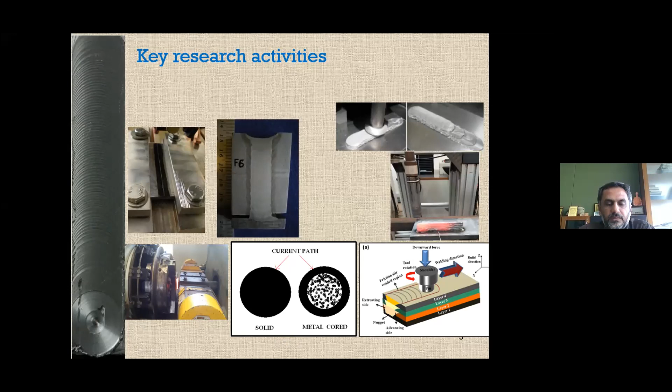So let's begin the session. The content of this presentation is like this: to understand friction stir processing, we need to understand friction stir welding, and to understand friction stir welding, we will be discussing friction welding as well. Then we will discuss some of the process variants. There are many variants of FSP, and today we will discuss two major ones: FSP for surface composites and FSP for superplasticity.

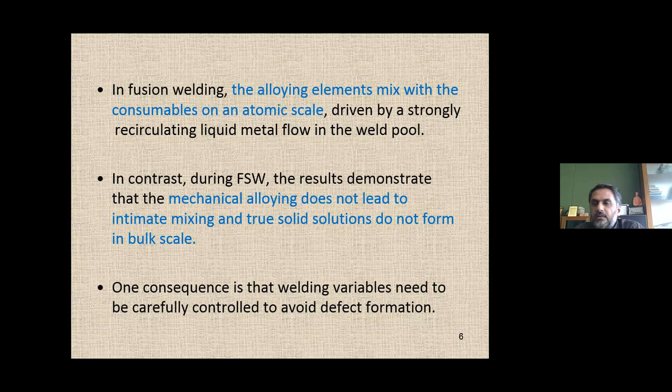So after giving you this fundamental difference, I'm sure you all know the welding processes which come under fusion welding. For example, all your arc welding processes, your resistance welding processes, your beam welding processes, and gas welding processes come under the category of fusion welding. While friction welding, friction stir welding, ultrasonic welding, explosive welding, and diffusion welding all come under the category of solid state welding.

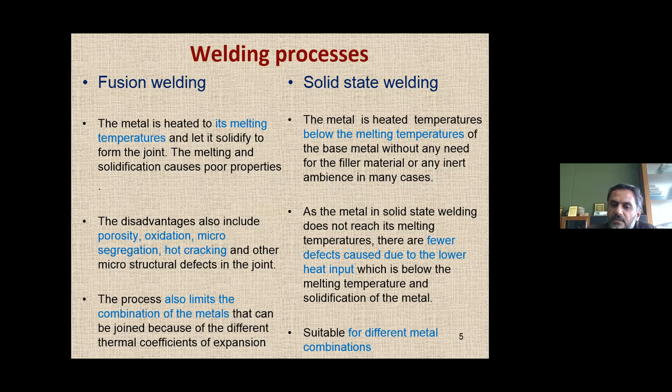So let us look at the small clip here, which will probably help you to understand the process. Now you see here, there is a lathe machine, and there are two components rubbing against each other. And when you hold that situation, there is friction, and friction leads to the development of heat. Because of that, the material becomes red hot at the interface, and then you apply extra force. So this process is called friction welding.

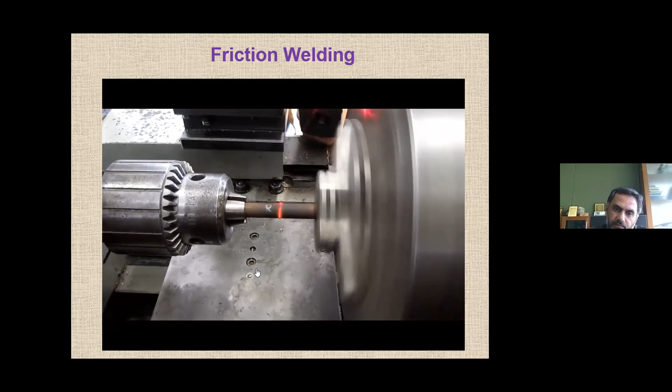And from this process, the new process called friction stir welding has been derived. This can be easily demonstrated to undergrad students on a lathe machine. So let us understand another variant derived from this particular process, which is called friction stir welding. How does friction stir welding work, and how is it different compared to friction welding?

So friction stir welding, why are we discussing friction stir welding? Because friction stir processing has been derived from friction stir welding. So what is friction stir welding? You see here, you require a special tool. Can you see there is a tool here? And this tool has special features. You see there is a pin, there is a shoulder.

So whatever pin you have, that pin has certain features also, like threads; you have a cylindrical pin, a conical pin. Sometimes you have a hexagon also, pentagon also. So various pin shapes are possible. In addition to that, there is another important feature, which is the shoulder. So there is a pin, there is a shoulder.

So what happens during the process? In FSW you require a tool, and the tool is initially penetrated during the welding, and then it will stir and mix the material. Let me show you a small clip here. Now you see here there is an entire process diagram given to you for a better understanding.

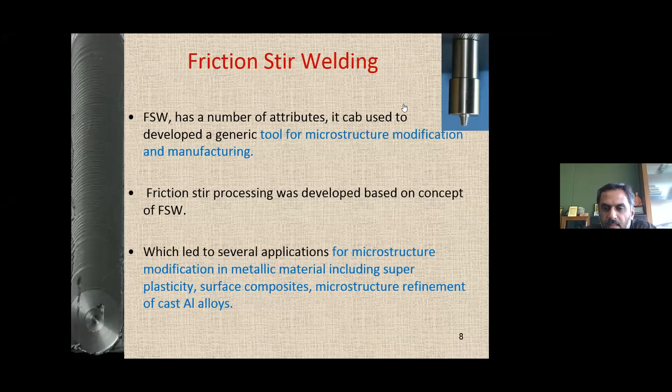So let me share once again. Now can you see? Yes sir, it is okay. Okay, so let me see, 8 slides. So that means there are many participants, and they are very silent. The slides froze because of technical issues. So this was the slide. Then did you see the video also? No sir. That's a problem. I have already covered another 10-12 slides in between, but nobody has reacted.

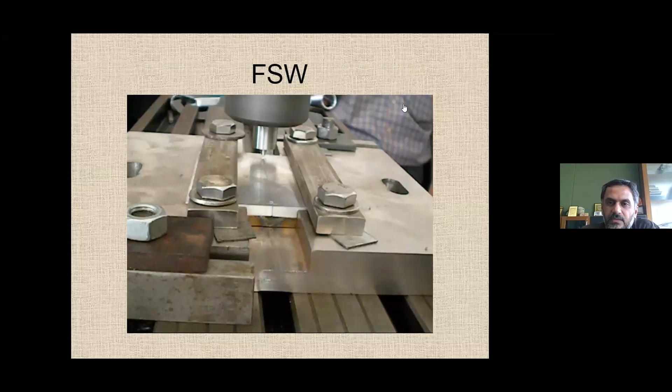Now you are all muted. Okay, all are muted here.

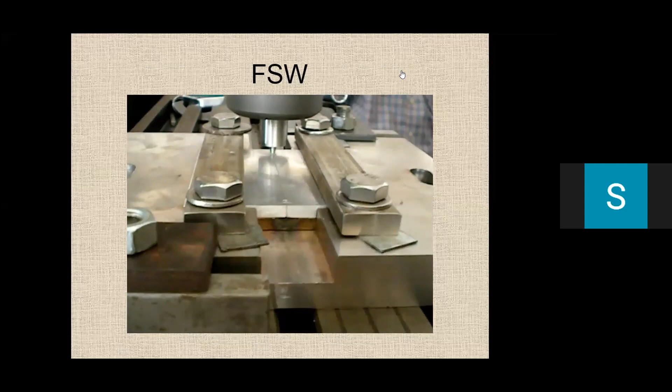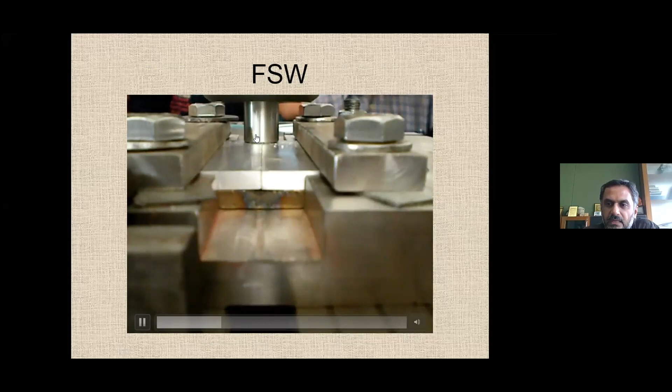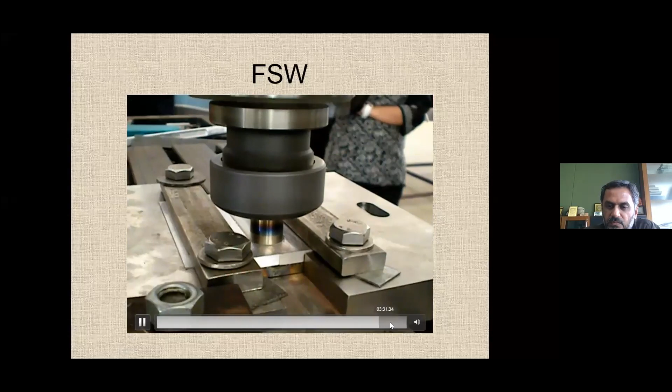Now you see there is a tool. I am just running it so that after some time the pin becomes invisible, and then you apply the feed, right? So you will get the joint in the solid state condition. So this is the clip which was presented. And as I mentioned, friction stir processing is not a joining method, but processing, right? There are various parameters, like in friction stir welding. Whatever parameters are important in friction stir welding are equally important in friction stir processing.

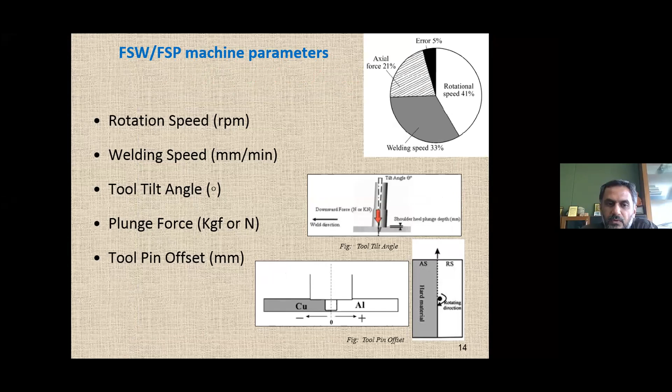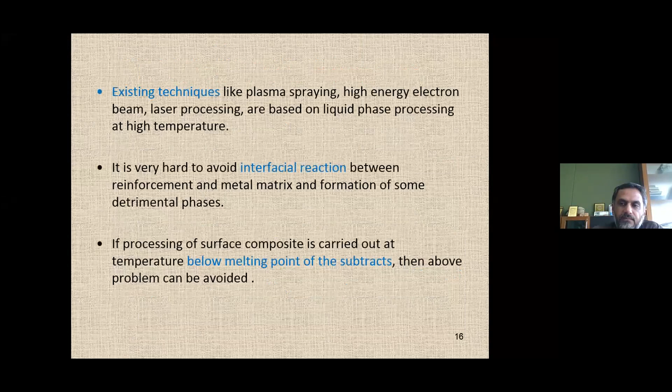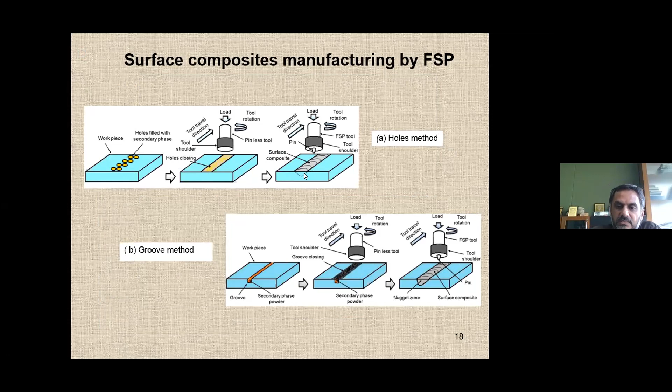Then the second step is to process with the pinless tool. And the third step is to process with the tool which has a pin, so that the powder gets stirred and mixed. Similarly, you do it in the groove method also. Then you have the sandwich method and the surface coating method. In both techniques, you don't require a capping pass. You can apply your stirring pass directly.

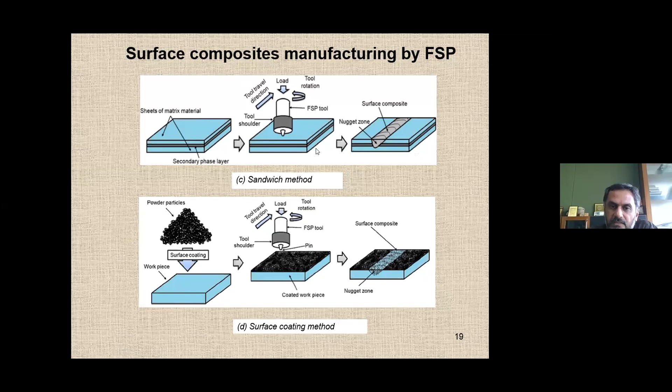So let us come to the first case study, and you see how we are doing it. Is the slide visible to you? Yes sir. Okay.

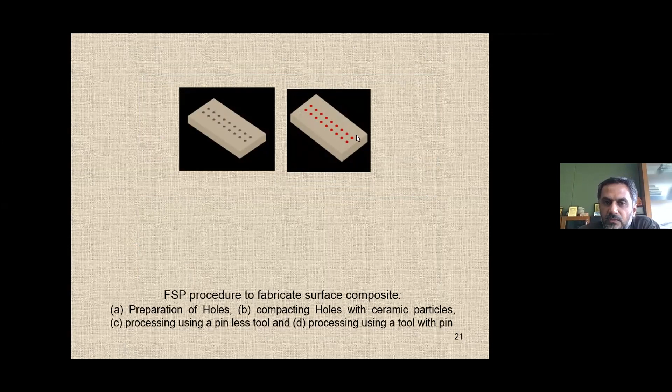Now there is a small animation to help you understand FSP for surface composites. You take a plate, and in this plate there are a lot of blind holes which have been created. These blind holes you now fill with ceramic powder. So I have filled those cavities with the ceramic powder. Then you process that area with the tool; you see there is no pin here. So you just close those channels, right?

You close those channels so that when you apply a tool which has a pin, the powder should not come out from the cavity, right? That is the intention. So this is your first step, this is your second step, third step is to close the cavity, and the fourth step is to process with the help of a tool which has a pin, so that the ceramic particles get stirred and distributed.

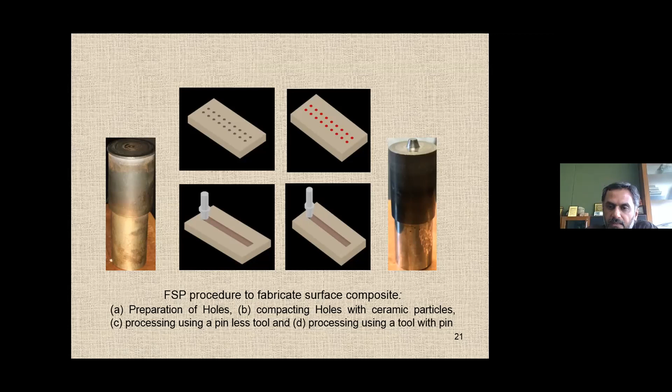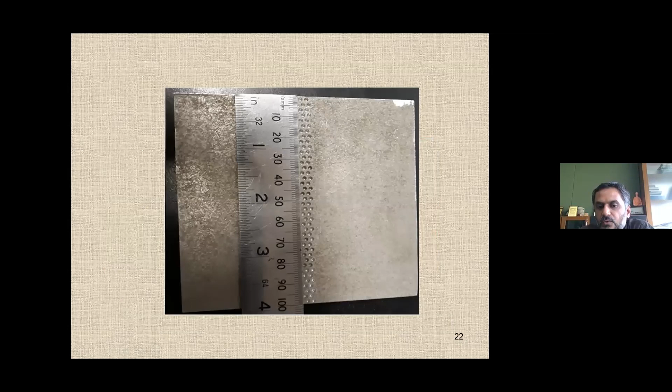And now in those blind holes you apply the reinforcement, which is your boron carbide paste. Then you apply a capping pass so that all the holes get closed. And then you apply a stirring pass. The stirring pass will stir and distribute the boron carbide in the matrix of aluminum.

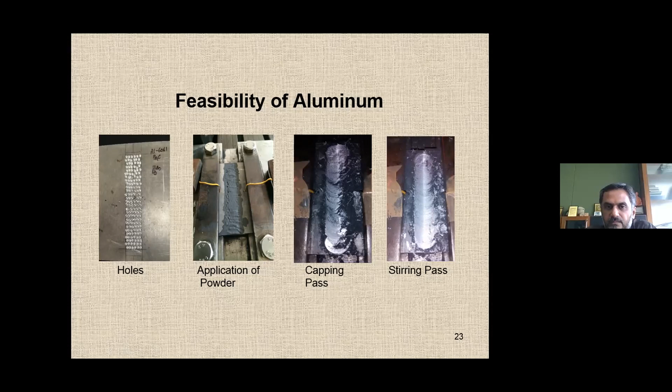So as I mentioned, the capping pass and stirring pass are very important. You can't apply the stirring pass directly. If you apply the stirring pass directly, then what will happen? There is a loss of powder, right? The powder will come out from the cavity because those cavities are open. But with the help of the capping pass, you are closing those cavities and then you are applying the stirring pass.

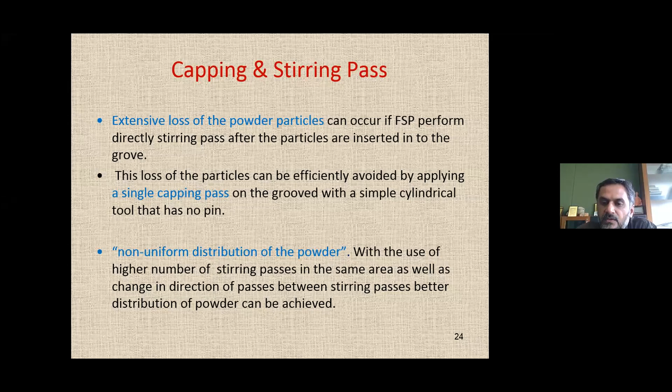That's the reason. And capping pass is just one, but you need to apply more stirring passes also. Why are more stirring passes required? Because you need to ensure that the powder is distributed more uniformly into the matrix of aluminum, right? So the same area you need to stir 1 time, 2 times, 3 times, either in the same direction or with a change in direction, so that the powder will be distributed more uniformly.

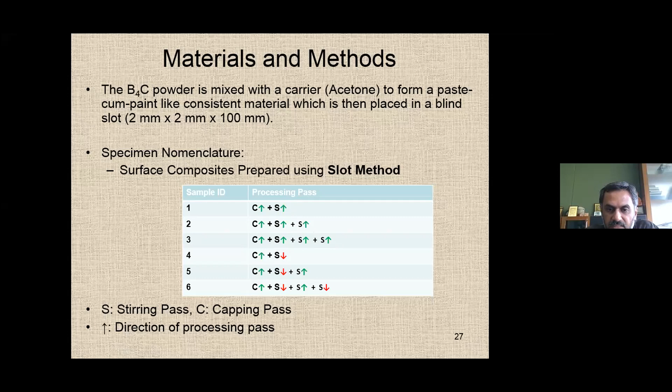So 1 stirring, 2 stirring, 3 stirring. Every time you have 1 capping, but all of them are in the same direction. But when you have 1 capping, 1 stirring, they are in opposite directions. 1 capping, 2 stirring with a change in direction, and 1 capping, 3 stirring. You may ask what is the reason for applying more stirring passes? The intention is to ensure that the reinforcements are distributed more uniformly into the matrix material. So this is for the slot method; because it is a slot, you require a capping pass.

Then similar experiments were carried out with the hole method also. You create a hole which is 2 by 2 deep, and then 1 pass, 2 passes, 3 passes, same direction, reverse direction. At the same time, there is a capping pass because it is the hole method.

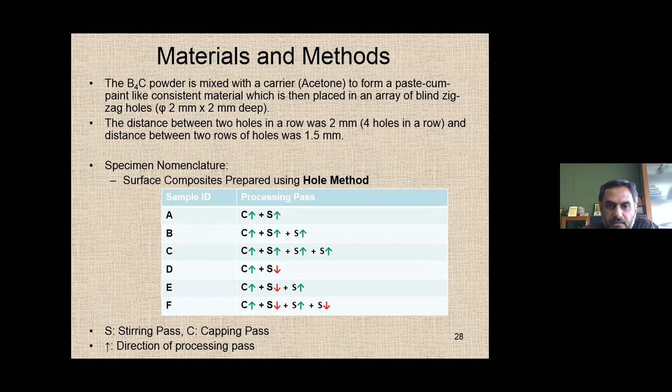Is the slide visible to everyone? Yes, sir. Screen is visible.

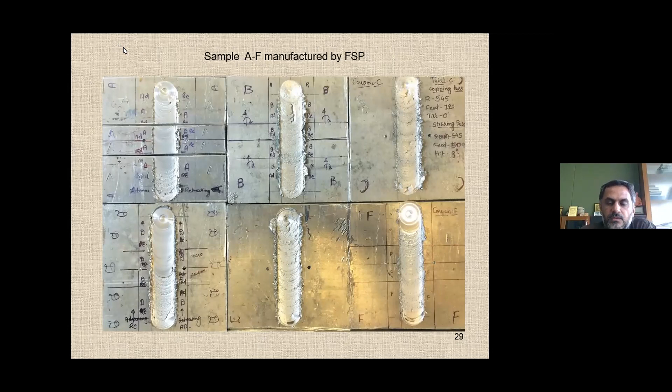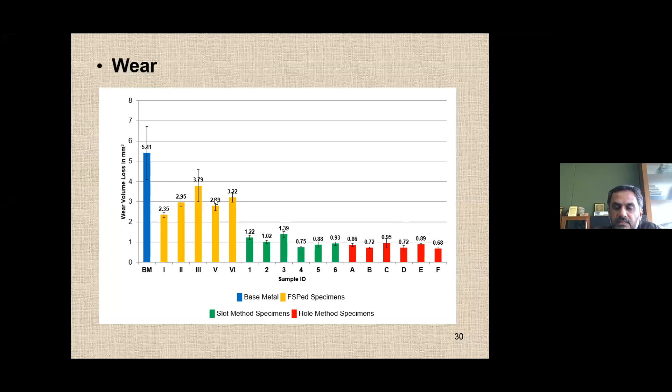What is the outcome of this study? We found that the surface composite produced with FSP has significantly higher wear resistance over the base metal, 87%. When you compare, the maximum you are getting is 0.95, and when you compare with 5.4, that is around 87% reduction in the wear. Even when you process the specimen with plain FSP without adding anything, there is a 56% reduction in the wear.

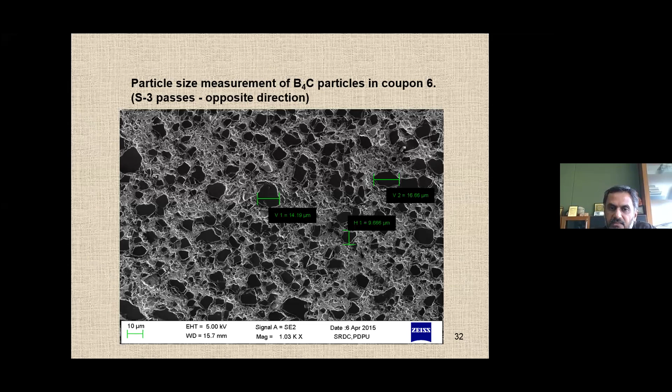Now let's look at another case study, which is on hybrid surface composites. Friction stir processing only, but you are creating a hybrid composite instead of a mono one. Earlier you added only one reinforcement, which is B4C. Now you are adding an additional reinforcement. There are 2 different types of powders: one is boron carbide, another acts as a lubricant. Now let us look at that as well.

So in this particular case study, what has been done? In the same aluminum, you are mixing 2 different powders. One is boron carbide, which we just studied, and another one is MoS2. You may have a question why there is a need to add 2 different ones. Boron carbide acts as a reinforcement, while MoS2 acts as a lubricant.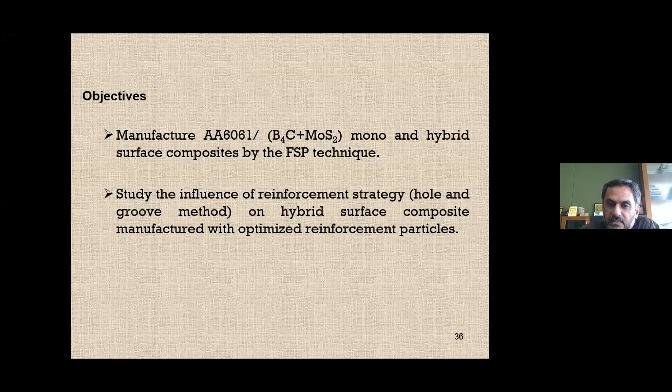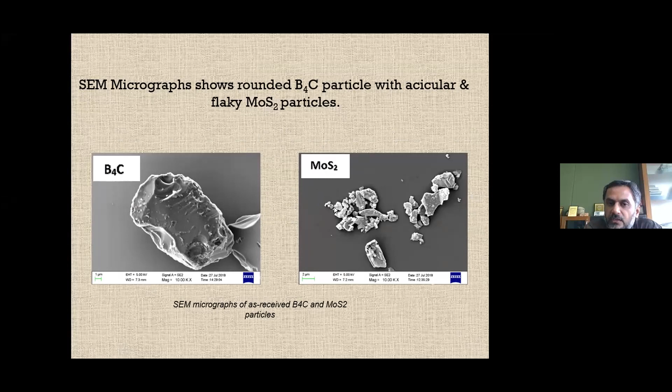So there are few reports which indicate that addition of MoS2 or any lubricant will help you to improve the wear resistance even further, right? So we have done a systematic study with the hybrid surface composite as well, and we optimized the mechanical and wear properties as well. So these are some of the SEM pictures of boron carbide and molybdenum disulfide. Molybdenum disulfide is normally used as a lubricant, right, in the dies.

So here you see there are 2 different powders we have selected. One is the boron carbide. In the earlier case, we used to add only the boron carbide. Now we are adding boron carbide plus MoS2 in a certain proportion. So here a systematic study was done from 100% B4C to 100% MoS2, with ratios of 25, 50, 75. That was the ratio which was varied, and the experiments were conducted with the help of the hole method.

Please understand, whatever parameters were optimized in the previous case, in case study 1, we found that 3 passes with change in direction was the best, and the hole method was also best. So we considered that as the condition. Now we didn't vary hole method, slot method, without FSP. We just started with one particular system, the hole method, which has the best wear resistance, and 3 passes with change in direction. And then all these compositions, from 100% B4C to 100% MoS2, were tried.

You see, this is your 3 passes, coupons A, B, C, D. Your A was the 100% B4C. Then B, C, as you are approaching, your MoS2 percentage is increasing. You see here only 100% B4C, while here you see 100% MoS2. Because MoS2 is a dry lubricant, it is acting as a lubricant. This is your C, which is 50-50.

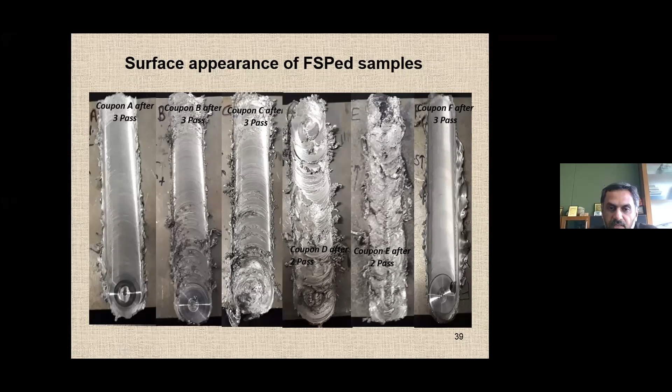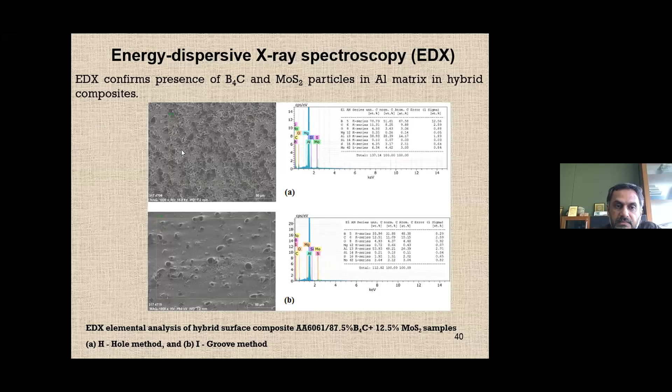And those were characterized for wear behavior as well. EDX was done, and it confirms the presence of MoS2 and also the presence of B4C in the aluminum matrix. And after the wear testing, we found that this particular one, which has 12.5% MoS2, has very good wear resistance, and that subsequently helped us characterize the wear behavior.

So that motivated us to do further reduction. Let me show you the wear behavior here. The blue indicates the wear in volume loss. This is your base metal. Then you do FSP, 3 passes without any addition. You see the 100% B4C, there is a drastic reduction in wear, right? And if you add instead of 50%, here you have 12.5% MoS2, which has the least wear, which is very good.

Hole method and slot method. But the moment you have 25% MoS2, the wear has further increased. 50-50 has the highest. So we found that 12.5% MoS2 is the best composition, whether it is the hole method or the slot method. Hole is more preferred because it has the least compared to the groove, a minor difference.

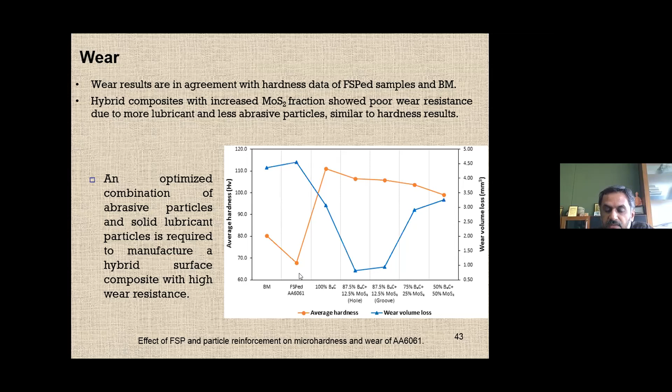Even if you compare with the 100% B4C in the previous study, when you are adding hybrid, you are further reducing it. You are improving the wear resistance like anything. And these are some of the SEM micrographs of those surfaces, which indicate that you have both adhesion and abrasion kinds of wear.

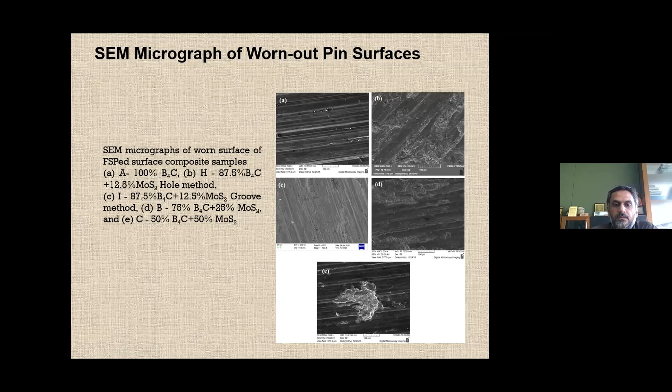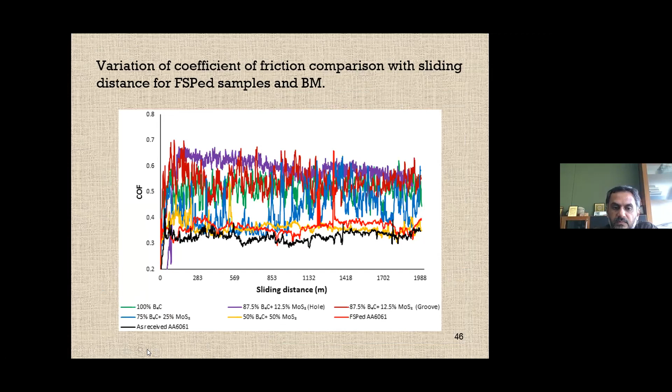So this is another slide which gives you an idea about the coefficient of friction under the different compositions, starting from 100% B4C to the plain FSP and as-received 6061. So the major output of this study is that this B4C hybrid composition is the best, with 12.5% MoS2, which is excellent.

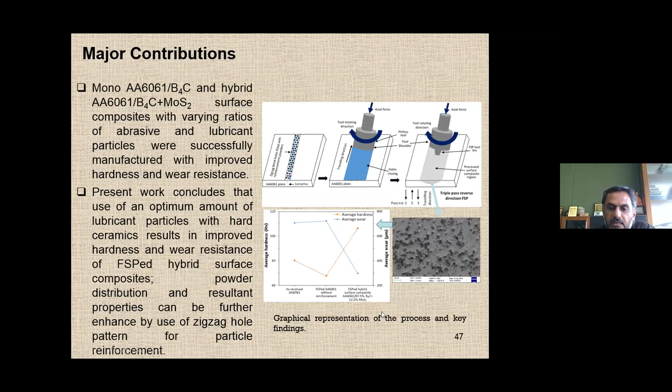And these are some of the papers which have been published by Dr. Sharma. He was a PhD scholar who worked with PDEU for his PhD, and he has published 3 good quality journal papers, 2 in the Journal of Tribology and 1 in Material Science and Engineering Technology.

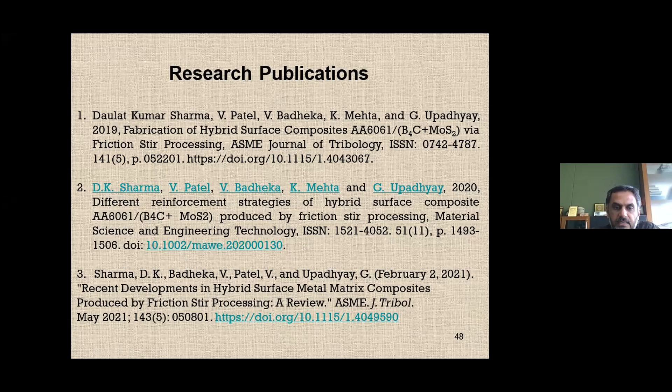So that was B4C. We understood 2 case studies, one related with the normal, another one the hybrid, and this is now the 3rd case study, which is friction surfacing. We talked about friction welding, then friction stir welding, then friction stir processing for surface composites, with 2 case studies. Now the 4th technique is surfacing.

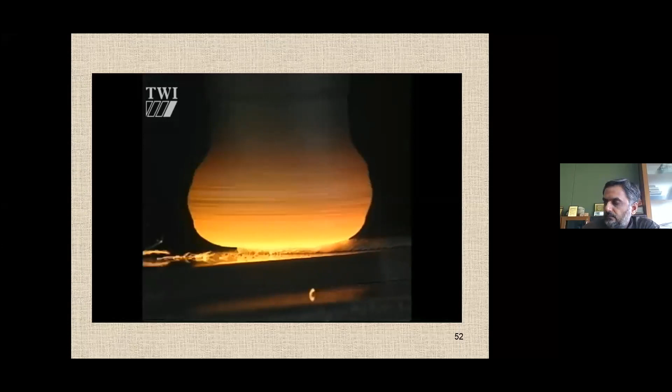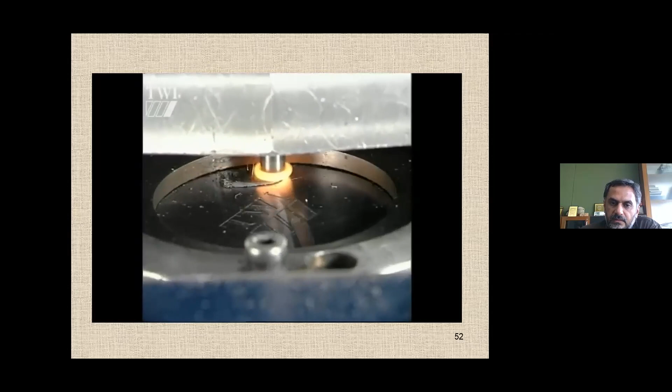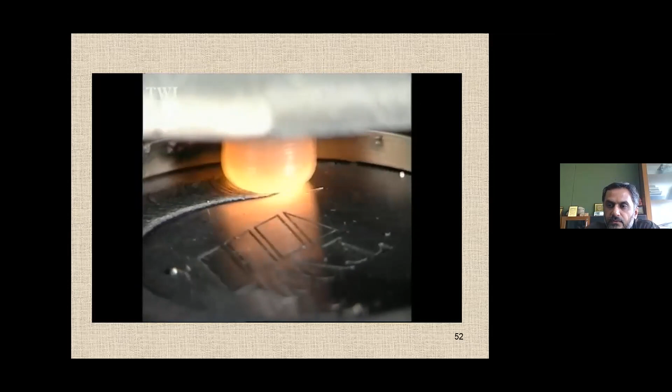Now with this layer you are feeding, if you introduce hard particles in the consumable rod itself, try to visualize there is a central hollow cavity, and this cavity is filled with boron carbide particles. Then those boron carbide particles will become part of the deposited layer. So friction surfacing is a technique called solid state cladding, wherein the wear behavior of the surface layer can be improved with the help of reinforcement particles.

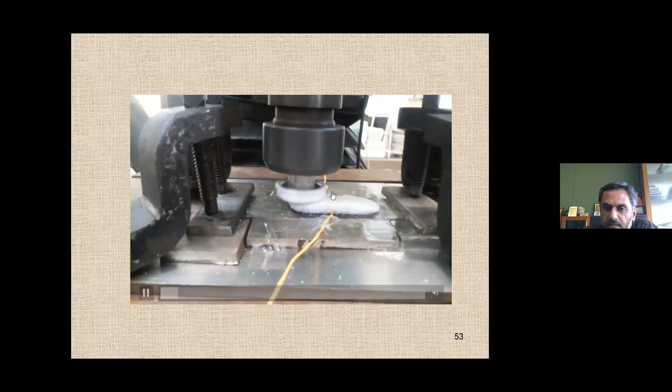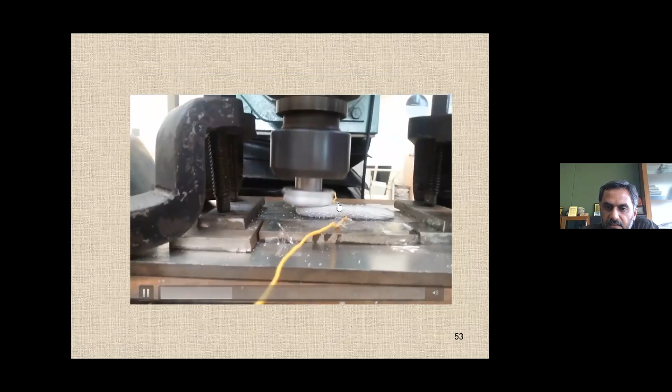So here you can see a small clip. This is again our own video. You see here there is an aluminum layer which has been created. There is an aluminum rod which is tilted 2 to 3 degrees, and you see the layer. Here you have around 2000 RPM, and you can see the diameter of the rod. And the temperature measurements are carried out on the advancing side and the retreating side.

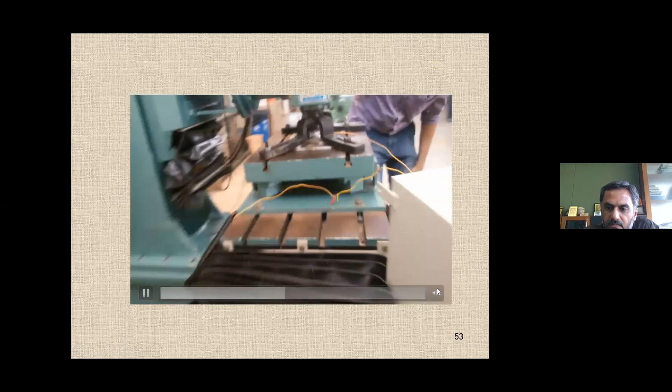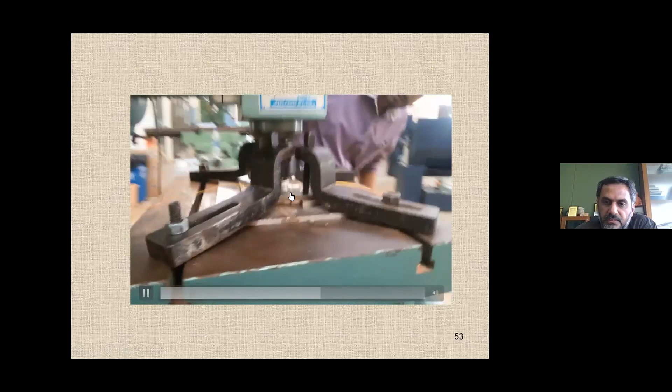So you can see the aluminum layer which has been deposited here. This is called friction surfacing. What we have done in our lab, we deposited 1 layer, 2 layers, 3 layers of aluminum. But in the single layer, we introduced boron carbide particles through the aluminum rod. You saw the video.

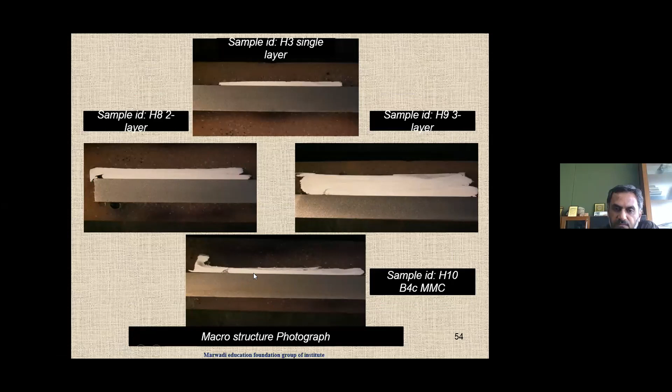In the center we drilled a blind hole, and then we filled that cavity with boron carbide slurry. Then we started the friction surfacing, and those boron carbides became part of the layer. And then we did wear testing with the single layer, double layer, and the boron carbide layer. And we found those boron carbide particles in the deposited aluminum layer.

Now friction stir processing, I told you that basic FSP is what? You don't add anything, you just process the material. Instead of two plates, you just take a single plate, right? And allow your tool to follow the same principle as that of FSW. So what happened when you process that region?

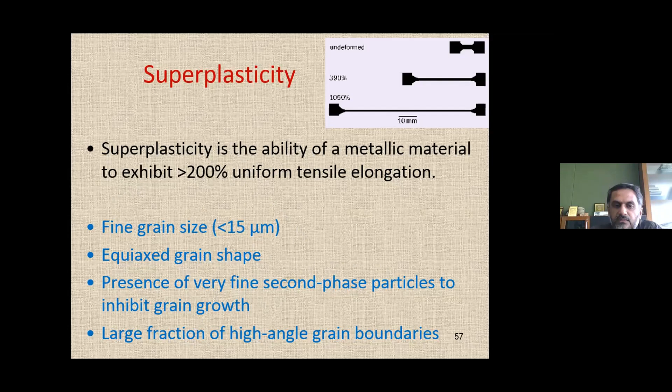Please understand, we are talking about plain FSP. We are not adding any reinforcement. When you take a tool and just run it through the aluminum plate, depending on your process parameters, you may get fine grain structure, equiaxed grain shape, very fine second phase particles, high angle grain boundaries. These are the attributes required to get uniform elongation. If the elongation is more than 200%, the material is considered to have superplasticity. So that is also achieved with the help of the FSP tool.

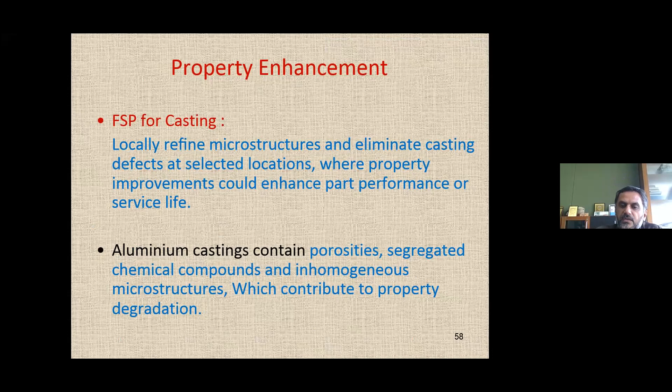As I mentioned, FSP is being used for castings also. In casting, you have a lot of porosities at selective locations. If you want to remove those porosities, you can use the FSP tool and the performance can be enhanced. Aluminum castings contain porosities, segregated chemical compounds, and inhomogeneous microstructures, which can contribute to property degradation. So the FSP tool can be used even for castings.

Now, you may have a question: how are you getting very good elongation, and what is the use of this high elongation? There are various kinds of aluminum. Precipitation hardenable aluminum, like 6000 series, 7000 series, 2000 series. These precipitates are less capable of plastic deformation than the matrix. Aluminum is going to deform more than the precipitates. Because of that, cavity nucleation is very frequent.

You may get cavities because you have two different materials, the precipitate and the matrix, both deformed at the same parameters. Because of the difference in deformation trend, you may get cavities. FSP allows breaking these large precipitates and dispersing them homogeneously. Because of friction stir processing, those precipitates get fragmented and distributed very uniformly into the matrix. Those precipitates also restrict dislocation movement, and you get very good elongation. So one particular reason is the precipitate.

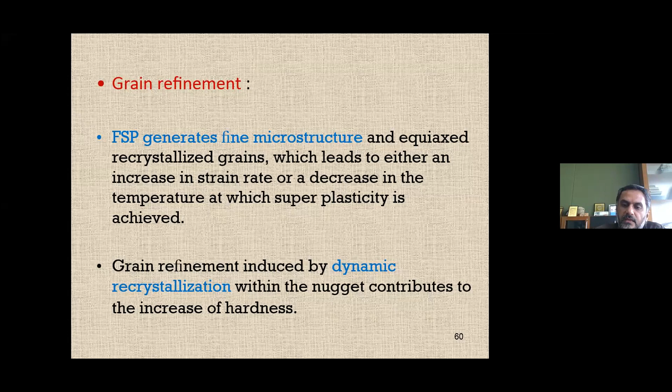And the grain refinement induced by dynamic recrystallization in the nugget contributes to an increase in hardness. So this is another mechanism, the grain refinement and the precipitate distribution. So mechanical properties such as ductility, fatigue, formability also get enhanced with FSP. Why? Because the large amount of precipitates you have in the matrix also get deformed, reduce their size, and act as a barrier to dislocation motion. And you have a uniform equiaxed fine grain structure, which also helps enhance the superplastic behavior of the material.

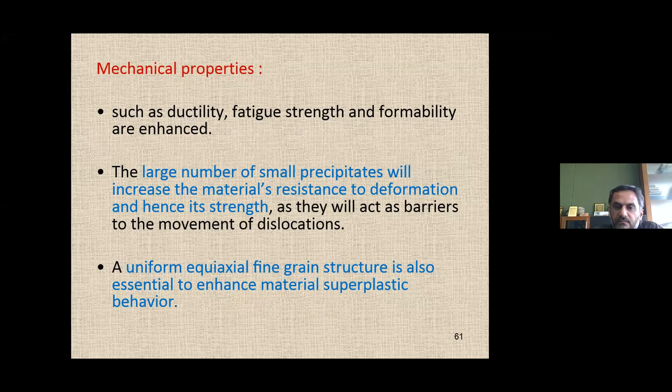Now, just to give you a few more glimpses of FSP, friction stir processing, as I mentioned in the beginning, you have two types of FSP, volume FSP and surface FSP. If your pin is penetrating throughout the thickness, it is called volume FSP. If your pin is penetrating only 2 to 3 millimeters, it is called surface FSP. So depending on your requirement, you can do volume FSP or surface FSP.

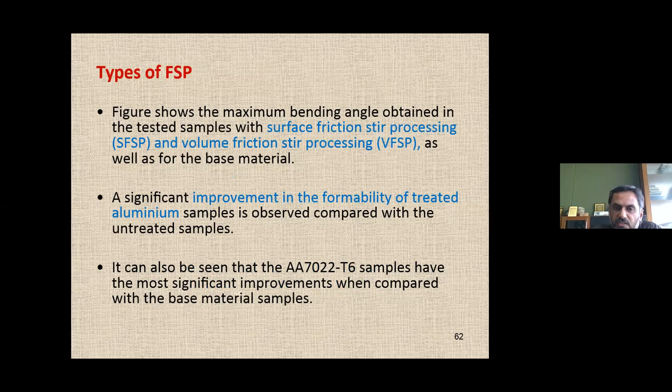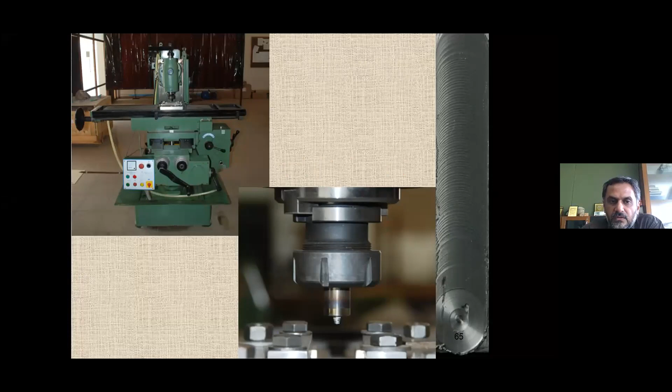So with this, I have come to the end of my talk. But before I end, I would like to show you some of the welding research facilities available at Petroleum University. We have a dedicated friction stir welding facility for processing surface composites and friction stir welding, all in one solid state unit. This is another setup, created under the ISRO project: a dedicated machine for friction stir welding, friction stir processing, and friction stir superplasticity. All those things can be done on one machine.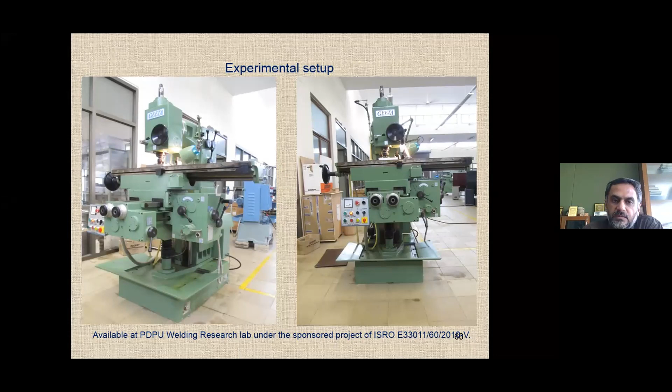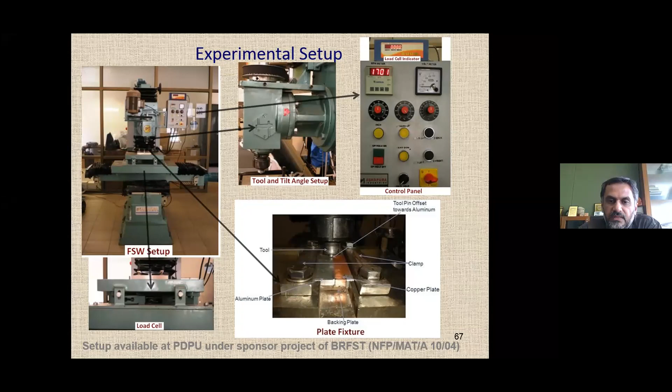Then we have another friction stir welding machine, but that is for dissimilar metal joining and friction surfacing, with a load cell, variable RPM and variable feed speed. Friction stir welding can also be done with assisted heating, so TIG welding and friction stir welding can be combined together. That is also available in our lab. So this is the hybrid setup we have.

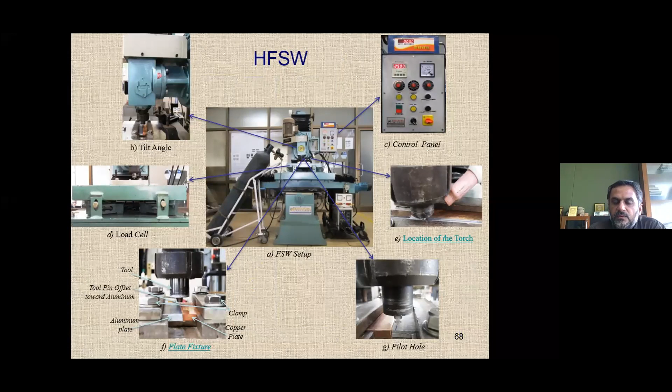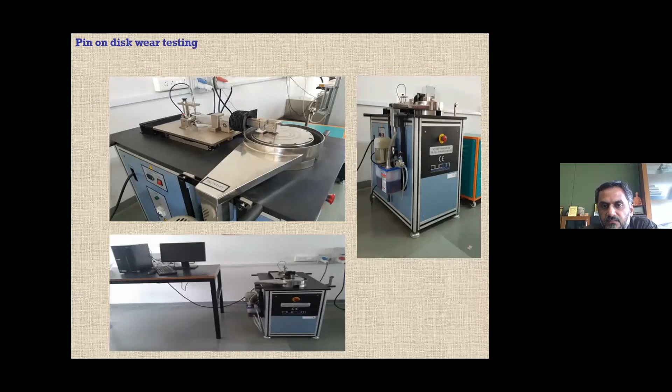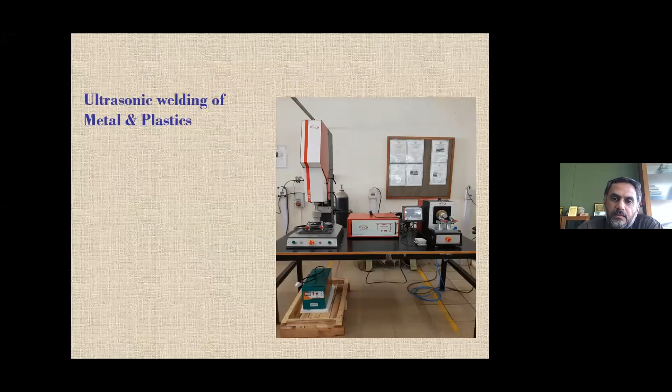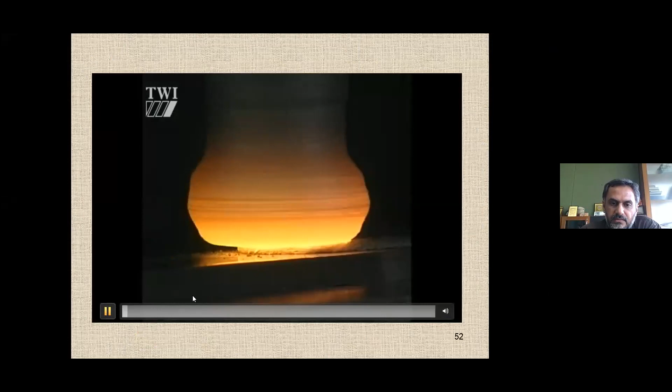Hello. Yeah. Hello, sir. Yeah, please. Sir, I want to know what is the basic difference between friction stir processing and friction surfacing. Okay, so in friction stir processing, you have a tool which is non-consumable in nature, right? While in friction surfacing, you have a tool which is consumable in nature. You see, there is a tool, in the form of a rod, which is getting consumed, and you are creating a layer here, right? So this is friction surfacing.

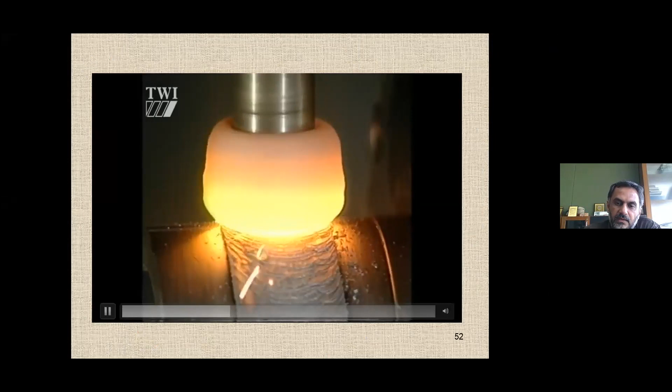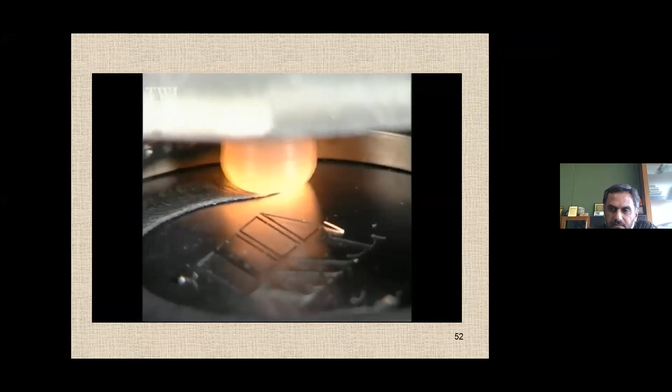But in friction stir welding or friction stir processing, you have a tool which is non-consumable. It is not going to be consumed the way you see in this video, right? And this rod, it is consumable. You create a hole and powder reinforcement can be added in the center of the rod, and then that becomes part of this deposited layer as well. Is this clear? Yes, sir. Thank you, sir. It is clear.

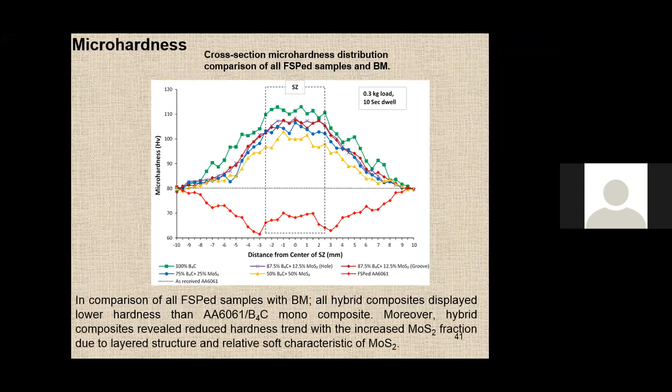Sir, regarding friction stir welding tools, what are the materials that are used for making these tools? Tool materials, say for example, if you want to work with aluminum, right? You can use H13 tool steel. H13 is the best for aluminum and its alloys. But if you want to work with copper, you need to go with tungsten carbide. And if you want to go with stainless steel, you may require another high temperature material.

Sir, does the tool diameter vary with the thickness of the workpiece material? Yes. Correct. You are right. If my job dimensions are different, then I need to design a different tool. Sir, is it available in the market, or should we make our own tool? No, we have to design our own tool based on our base metal type and its thickness. Okay, sir. Thank you, sir.